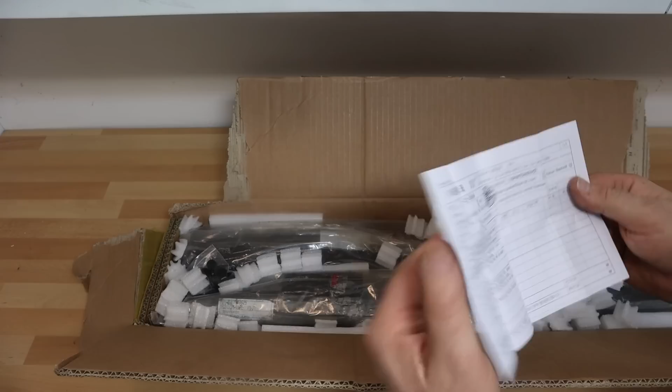And I now got a package. I think it's best to have a look here at what it looks like. Seems pretty well packed. What is this? Oh, handwritten notes, always nice. It's a bit different from the standard eBay seller. But I think so far it looks okay.

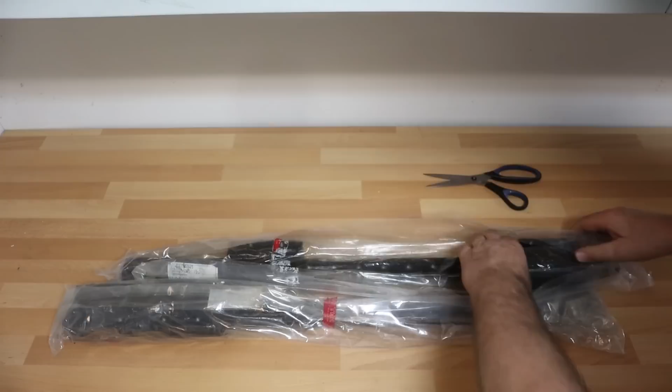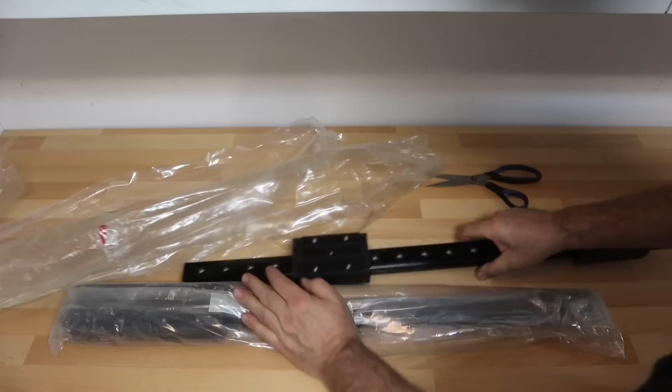This is heavy stuff. But they are really... This one runs very nicely, but this one... Yeah, okay. There is an oiler hole in there. M8. So I think this might actually be larger than the standard. This can be the long, the 93. 70.5. And the hole distance, 50.

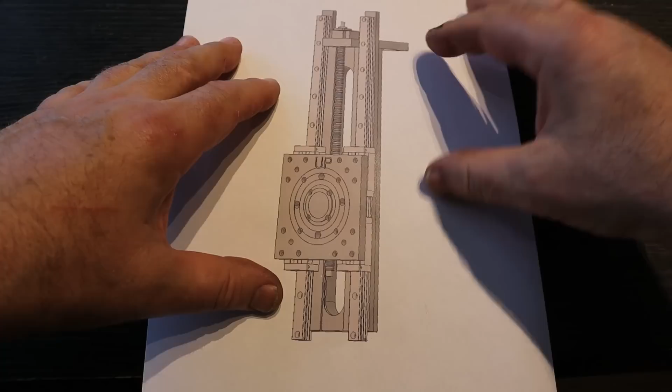This black surface here, that is something called a Raydent treatment. It is mainly for rust prevention. Anyways, good. So the linear rails will be used in a new Z-axis for the milling machine. You can see them here. Here are the rails, the wagons under there. There will be a new plate here. I call that a Z plate. There will be a new top plate. The ball screw will be moved. And there are a lot of modifications really. But this is the overall picture.

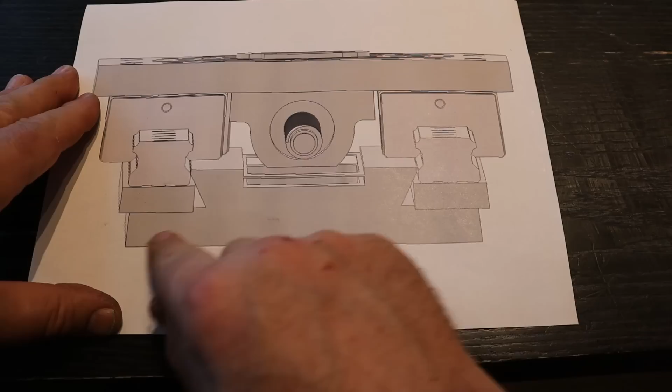If we look from the top, then this is what it looks like. Here is the original Z-axis with those angled surfaces and all that. The gib goes in there. But I keep every part here, so I will not go wild with the angle grinder. The rails go on here, on top of the former sliding surfaces. There is a spacer bar needed. 50 millimeters is what I have measured. Then the wagon should go clear of that surface there.

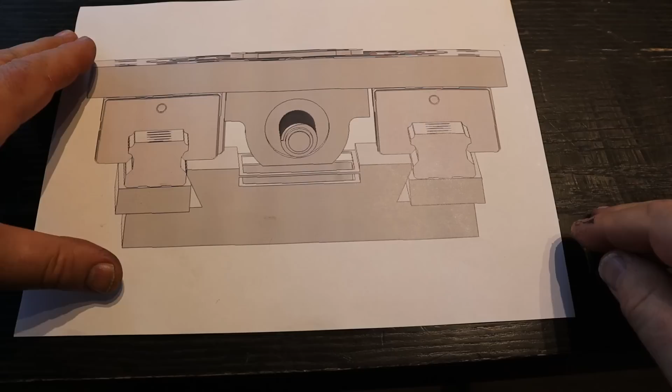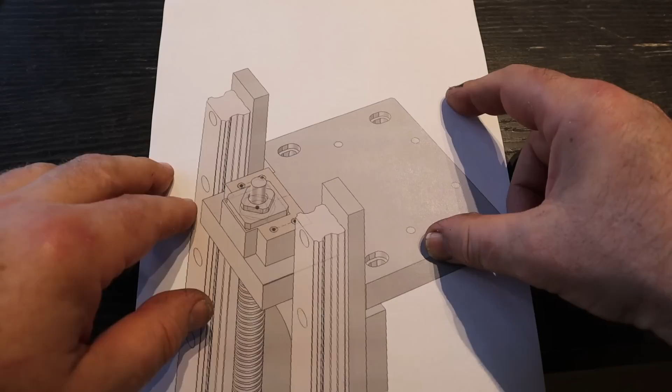The ball screw position that was formerly here somewhere is now put forward here, so it is in line with the wagons. And looking at it from the top, where the motor for the axis will come. So there's a new top plate here, and there will be one of those standard BK15 bearing blocks. And my current rather big stepper motor will go on top here with a claw coupling. And here you can clearly see the spacer bars and the rails, how they fit together. So it all sticks up a bit here, because the rails are a bit longer than the top of the machine. Yeah, and from the back it looks like this.

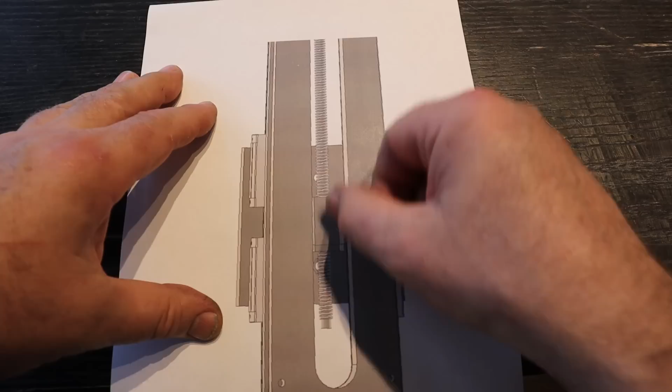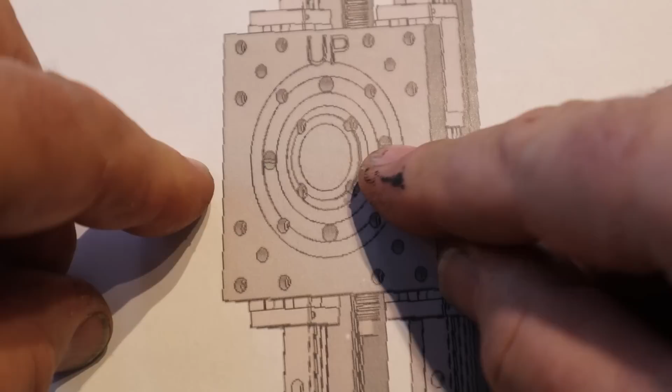So there is the nut holder for the ball screw nut that will be screwed on the back side of the Z plate, as I call it. Don't know really what to call it. So this is the Z plate, and you can see there's a whole lot of holes here. And it will connect to the spindle head, the gear head. There is the alignment ring here, and there are 1, 2, 3 M14 screws, and even one extra if needed. And just a small detail on the back of the Z plate, there is a countersink for the head, so I don't need to go in there and hold the head for those screws.

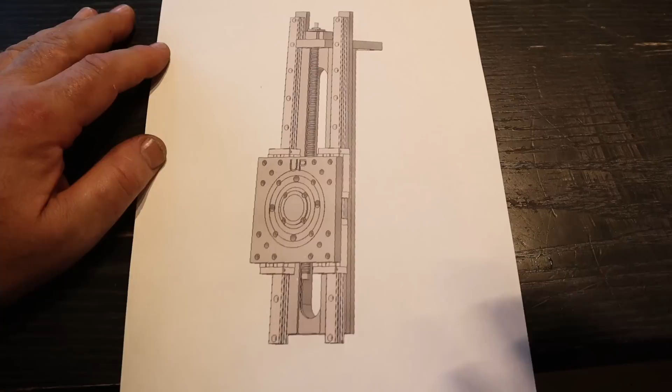Yeah, let that sink in a bit, guys. How much work isn't this? Well, it is a lot of work here.